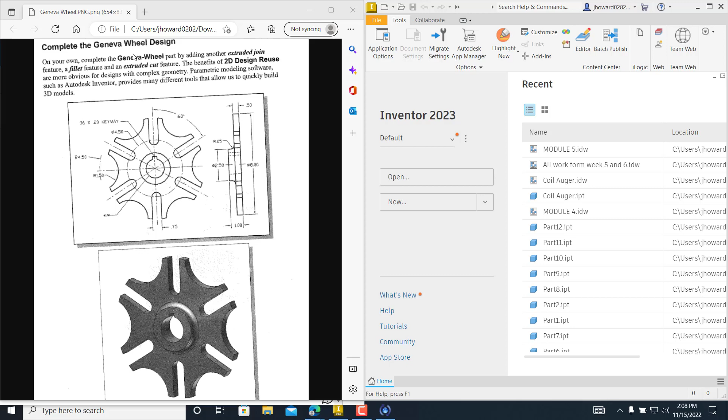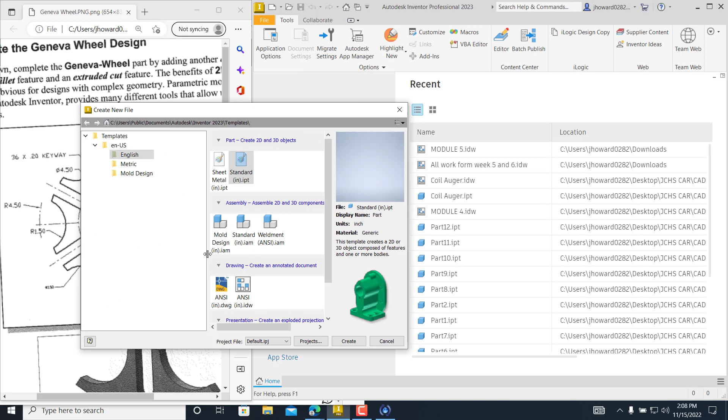We are getting ready to draw the Geneva Wheel if you need help with it. This is in standard inches. Let's blow it up a little bit so we can see it.

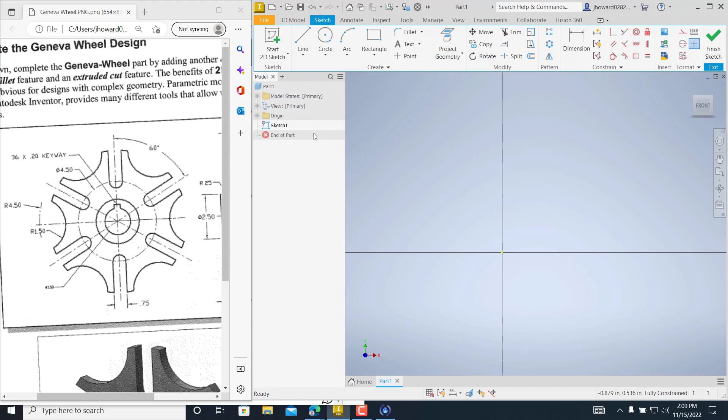File new, and this is standard IPT. So we already drew this. I'm going to draw it, trying to think what would be the easiest way to draw it so I'd have the less model history. There's a lot of different things I could do here. I'm just going to start out right in the middle here, and I've got a 1.5 diameter.

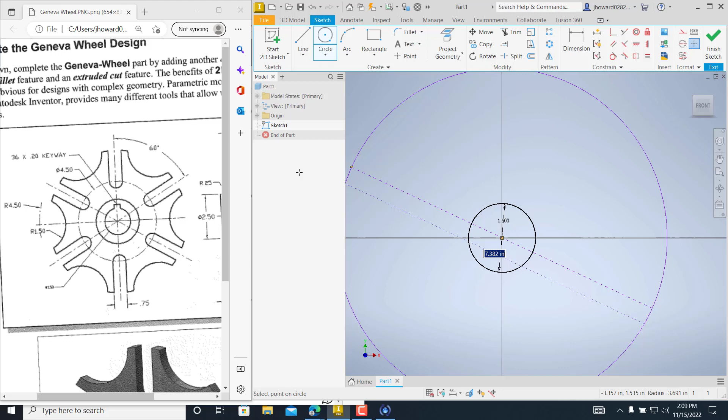Actually, I don't even need that right now because I could add that in later. Let's just do the bore. That's right, 1.5 diameter is perfect. And then I'll go ahead - overall it's 8 inches on the diameter.

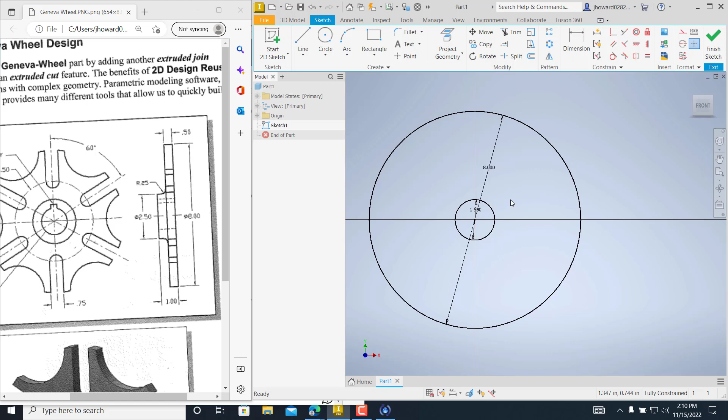Alright, we got that. There's a few things I could do here. The thickness is half, I want to show you. I'm just going to go ahead and add the extrude, the thickness on this of a half of an inch. Come over here, and I'm just going to go right here.

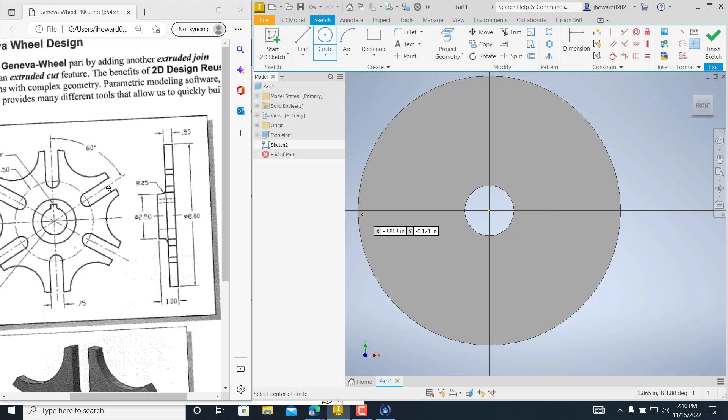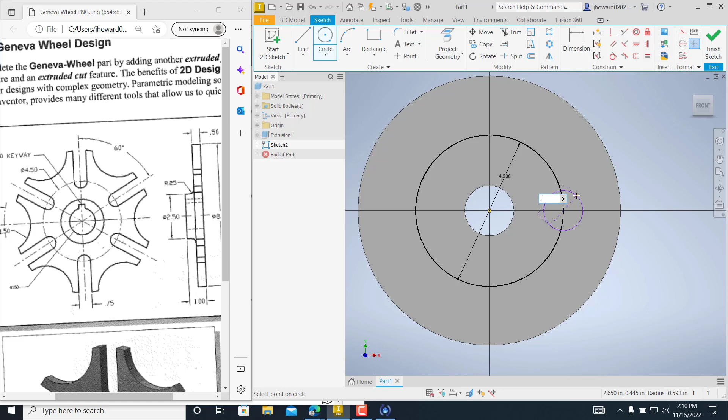And this circle right here, diameter is 4.5 diameter, so I just really quickly do 4.5. And it just shoots all the way out. So I'm going to have right there at that intersection a 0.75 diameter. I see that right down here.

I just hit line and hit it at my quadrants up here. Bring it all the way out. Come down and bring it back to my quadrant. And then I want to trim this out. All I have to do at this point - I've got a couple things I want to do. I'd like to put in this, we've got this circle in here too.

And this was actually at 60 degrees, so I should have probably done that to begin with. Let's go back there and do that - it might make it a little easier on us. Let's come up here and put this line from here to over here - angle-wise straight up and down is 90, and 60 off of it, so this would be 30 degrees. So I just tab over to there, 30, and now just do the same thing you did: 0.75.

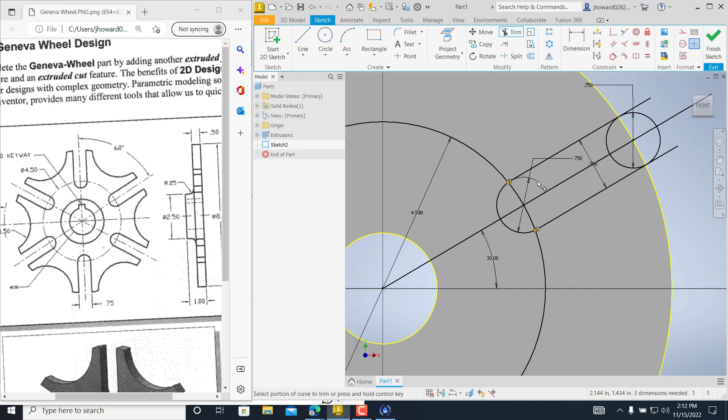And if you want, you can come up here and hit that intersection there and do 0.75 as well. Line - what I do is hit that quadrant, we know. So what I want to do is put me a line up through here like this, use my tangent, snapped it right on, and you could just do an offset if you want from that. There we go, and just trim out this stuff. I think it might be a little easier to do it like this, and then just tie it together so you'll have a closed point.

Alright, so now I'm going to delete this line out so it's gone. Also, if you'll notice here, you got this little cutout, this little circular cutout, and it's going 4.5 radius, so I want to put a 4.5 radius in here - double that, it's a 9-inch diameter, right? So it comes out here, and then what we'll do is center it up right there, and that's the center point of it. And we're going to go out to 1.5, so that would be a 3-inch diameter. We are just going to leave it just like that.

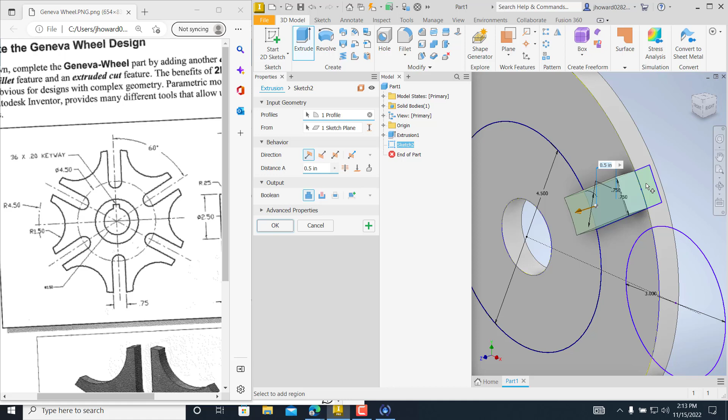And at this point, I want to rotate it around this thing, so I want to do a plane - no, actually not a plane, but I want to do a work axis, and come in here. You want to catch the center - you see that little line pop up? Click it, you got it.

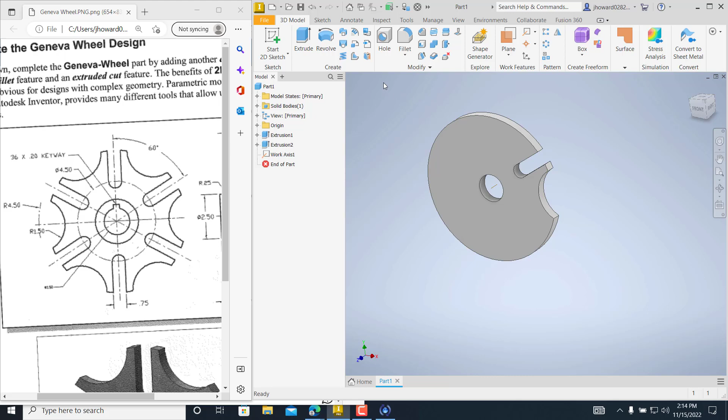And now let's go about this thing. I'll open it up here where I can see a little bit better, and let's find our tools that we want.

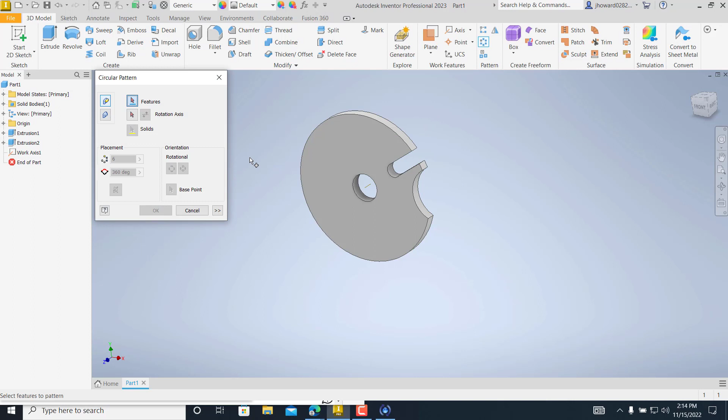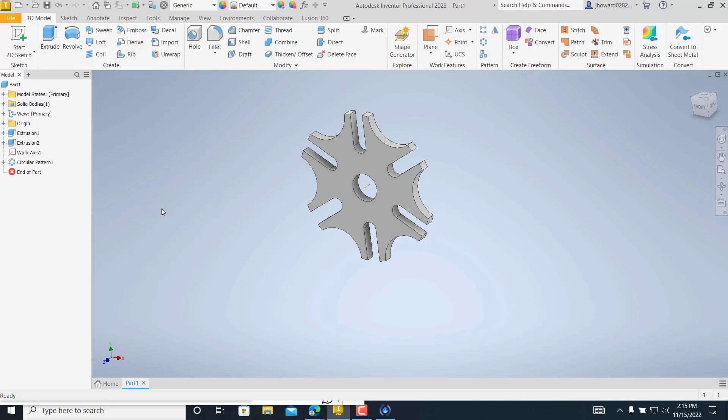Here it is, patterns - circular pattern. The features that I want, I can come down here and hit extrusion 2, or I can go there and click them directly. Either way, if you hit extrusion 2, your axis is going to be that center line - you could have clicked it over here as well, that work axis. There are 6 of them, and 360 degrees. Hit OK and it puts it in there for you. Roughly, that's your Geneva Wheel right there. We just got a couple little things to do to finish it up, but let's do that.

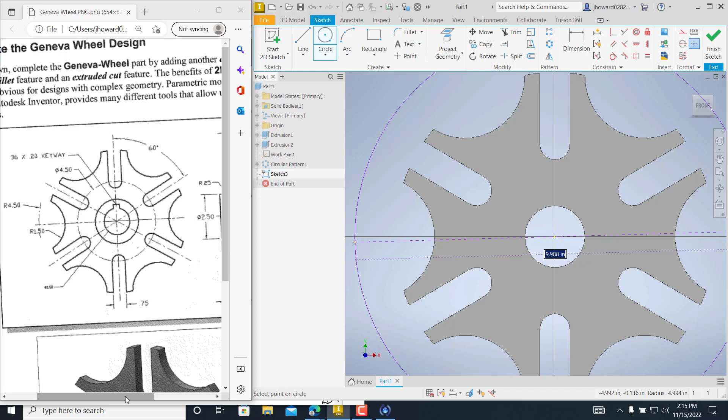So what I want to do now is start a new sketch on the face of it. Circle - this one is out here, and we can look at the side view of it. It's 2.5 diameter, so 2.5, quick and easy. If it doesn't do it, I have to hit dimension - for some reason it wasn't coming up there, but 2.5. That's basically it, finish the sketch on that.

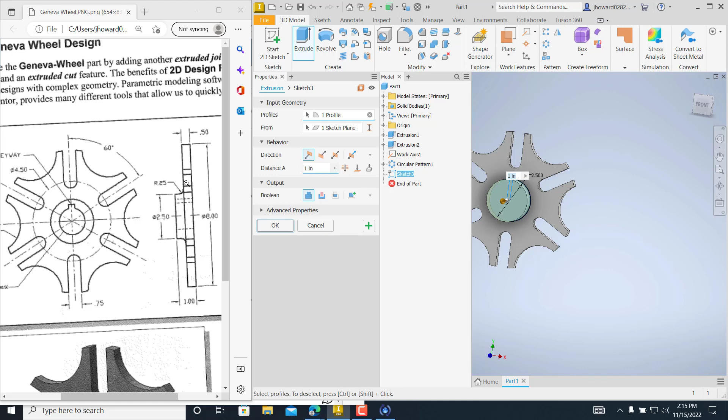Extrude that one on out. How far does it go out? 1 inch - this was a half, so it'd be a 1/2 inch extrusion from the base where we started from.

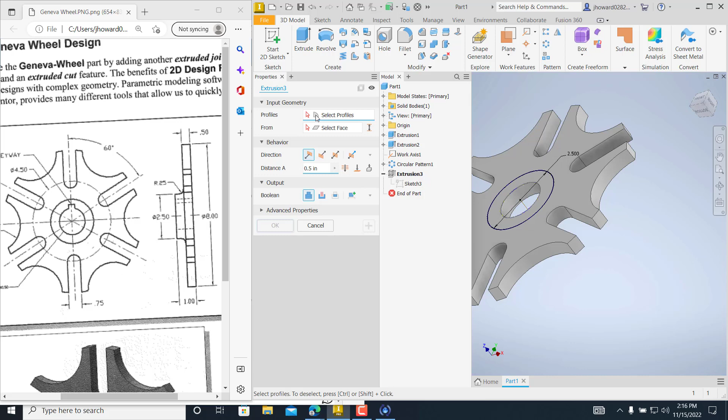And I didn't like that, so I'm going to go back in and fix that because my hole should have been through it. It's actually in my extrusion here, in my profile. I'll delete my profile and catch it again - it should be not catching the circle. So what I've got to do here is go back to my sketch, and I can either put a circle in there or project my geometry, whichever one I want to do. Now it's going to recognize that, and when I go to extrusion, I can go here and delete my profile and add it back in. See, as I get closer to it, it just emerges, so we're good.

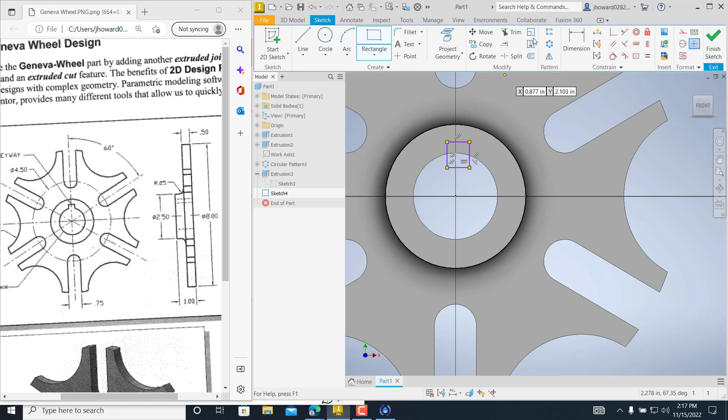New sketch on the face of it. I'm going to put that keyway in - just roughly, I'm going to go in here and do that. Dimension it out - this keyway is 0.36 wide. Pretty close to it, wasn't it? And 0.20 up, but before I do anything, I'm going to pull that up.

I hit escape before I did that. Bring this up, dimension it out - 0.2. Okay, so that's not what I wanted to do. I'll grab that, escape it, and pull that on. Well, I got it locked here, don't I? 0.4 is fine. My dimension, I want to go from here to here.

Actually, I'll put a line right across here - gives me something to measure off of. I'll go from here to here, that should be 0.2. And then also from that point right there, there to there, should be 0.36 divided by 2. That puts everything right in the middle.

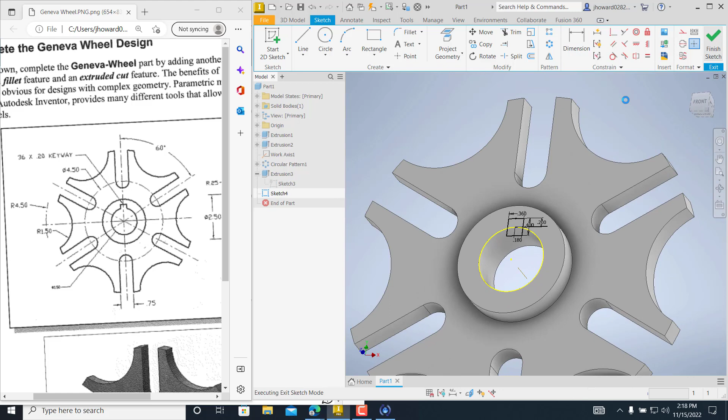Finish it up, extrude it out. We'll just do both of them, cut through all, make sure cut's on, okay. And you notice it kind of caught there, so we've got to go back and see what's going on here. I see what happened.

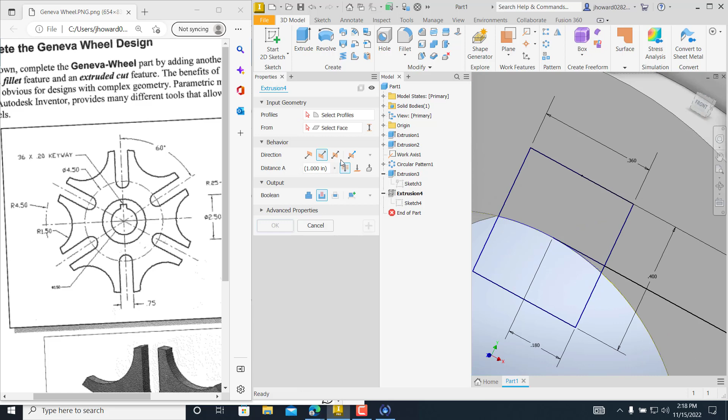So because that line was there, it just didn't catch all that. So double click this again, drop that profile, click on it. When you come in here, click it, click that, and then make sure you catch that and cut, so all of it's cut through there.

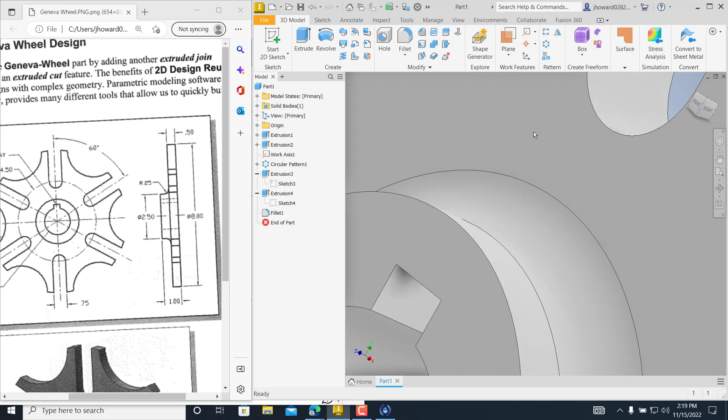Looks good. This has also got a fillet on it right there, radius of 0.25. At the very end of a drawing, make sure that you get those added in, because those are very important. Then hit OK on it. So that's got that, looks good. And that should be your Geneva Wheel.